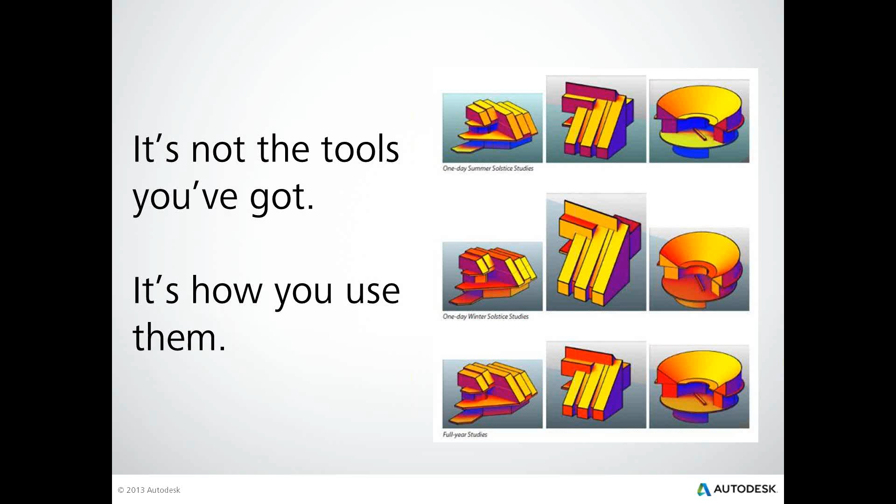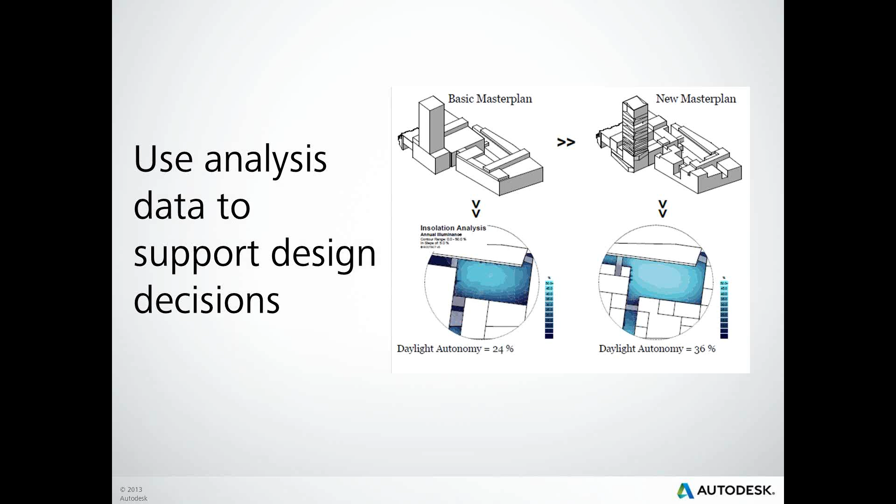Autodesk has worked really hard to try to make building performance analysis easier. And there's a danger in that when it becomes so easy that you can just press buttons and start to see results, it's easy to start getting results without knowing either what the inputs are that led to that result or understanding what to do with the output of that result to make a better design decision. So we see a lot of people sort of just pressing buttons and looking at colors without really knowing what to do. For example, with a false color overlay like what you just saw. And what we're looking for is equipping people to be able to use analysis data to support design decisions in a more rigorous way.

And what we find is that architecture students often don't learn enough building science and analysis in their programs. Many engineering students don't learn about buildings at all. That was the case with me in my mechanical engineering course. And professionals are being asked to use new tools and processes. And we're hearing from both educators as well as people in industry that it's a core competency to be able to predict and assess building performance, that there's a shortage of people that actually know how to do this work in a real way. People are having difficulty finding employees with adequate green skills. This is as phrased with a fall 2012 survey from the AIA.

And part of the opportunity here is that students actually want to learn this stuff, and sometimes they don't have classes in it. So we've built this program to allow anybody that wants to learn building performance analysis to be able to study this stuff on their own and learn it in their own time.

And I think here it's worth mentioning that some of you may be on this call because your instructor suggested that you join, and this is going to be a required part of your course or an extra credit part of a course. Or some of you may just want to learn this stuff on your own. And this course is built for both scenarios.

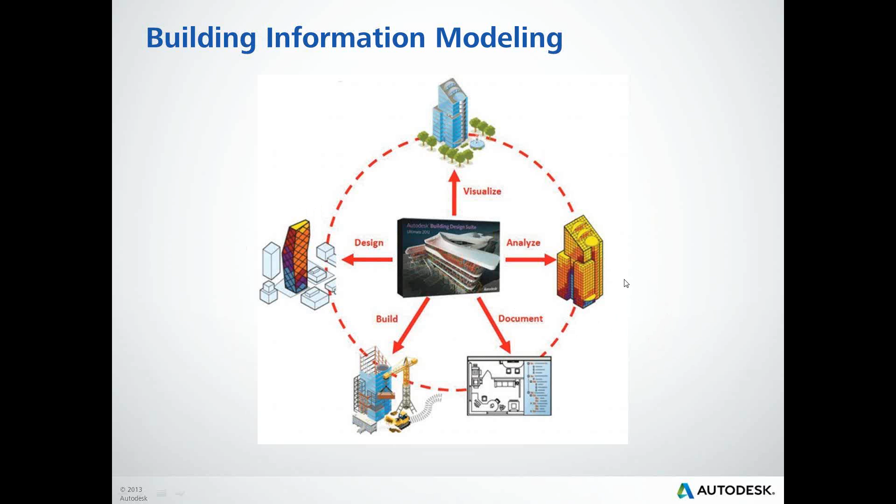This course focuses on analysis and design and how those things can be used together, how analysis can inform design. Revit and Vasari are the main tools that are covered in the course. Vasari essentially is a simplified version of Revit. It only includes conceptual masses, so that's what you see here. Big blocky buildings. You're not seeing exact windows and exact doors, it's more for form and orientation and things like that. But you can do a lot of interesting analysis on top of these forms, and making performance-related design decisions early in the process is often really valuable.

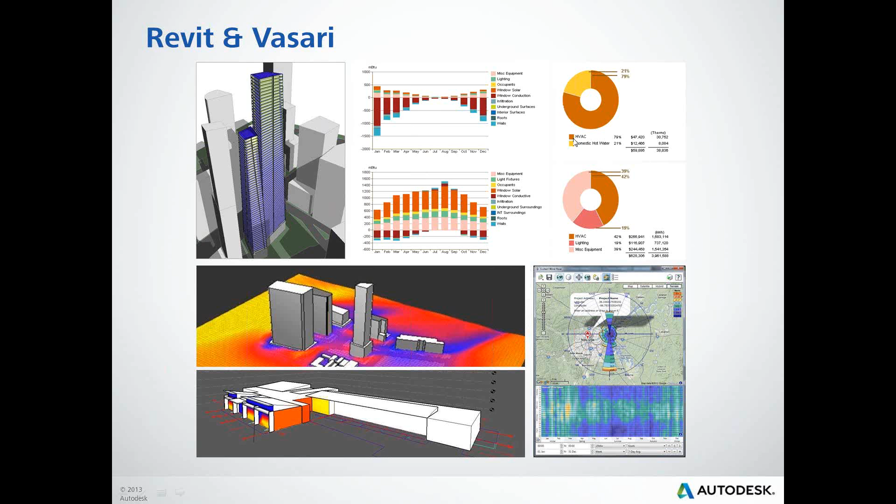So that's why basically Vasari has been hived off from Revit, and it's got the conceptual massing plus some additional analysis capabilities that we'll talk a little bit more about later. But you see some examples of it here with wind and airflow analysis around a building and solar radiation analysis on the faces of a building. And both Revit and Vasari have whole building energy analysis capabilities within them. So that's some of the charts you see here. And we'll talk a little bit more about that right now.

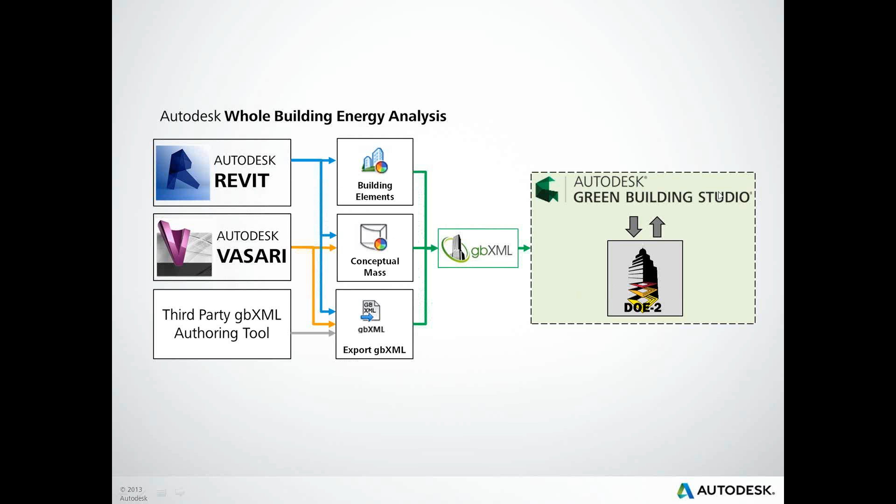And all of this, like Green Building, gbXML is a file format that passes it to Green Building Studio, and it uses DOE-2 as a simulation engine. So often people are really confused with how our tools relate to each other. This is sort of how they relate to each other. Revit and Vasari are alternate ways of getting a three-dimensional model into Green Building Studio where you can do a whole building energy analysis.

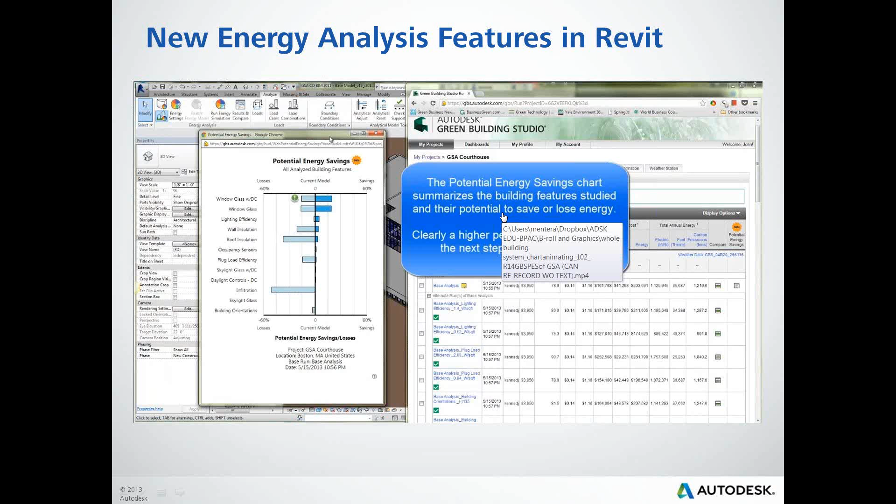There's some new energy analysis features in Revit that we're really excited about. I'm going to give you guys a quick demo of that right now. I'll talk over this video a little bit. So in the past, it was always harder to do energy analysis on really detailed models. So this is an example of a detailed Revit model that's got curtain walls and windows and shading devices, and maybe very detailed. And that would have been a model that an architect would have made, not thinking

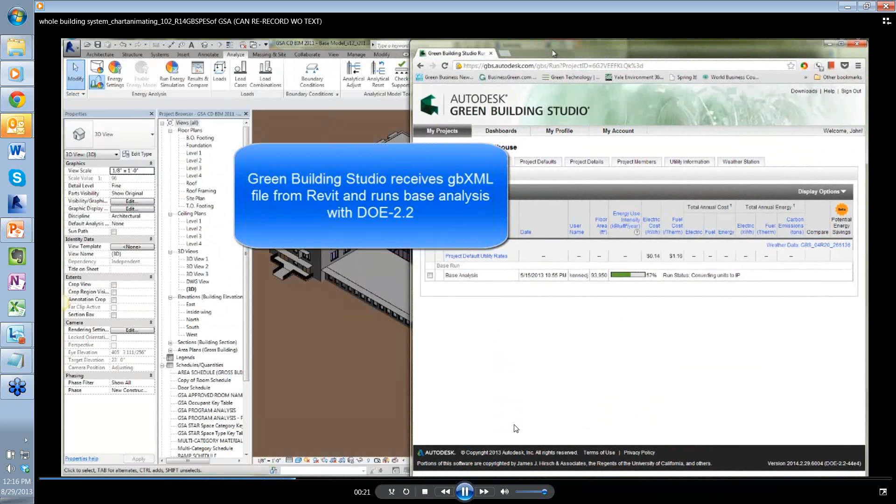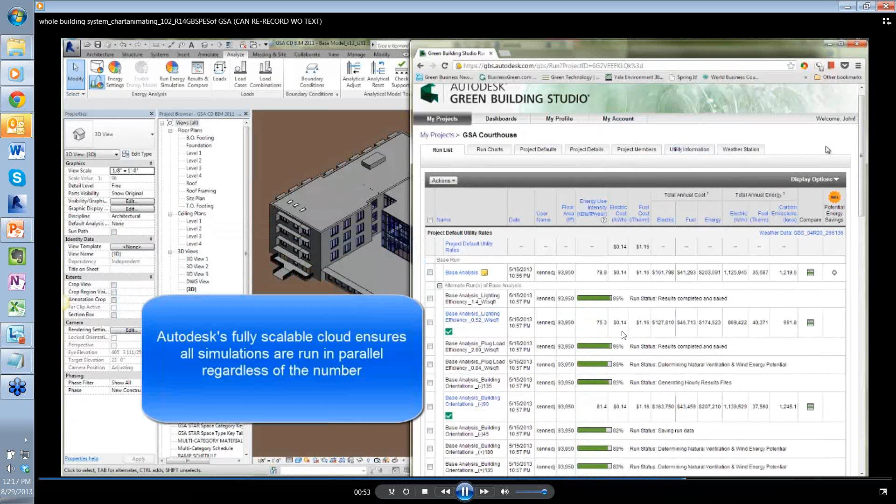about energy analysis. Now you can basically click a button, and it already happened in the video. This button here, building element model within Revit, and it generates the energy model in a much better way than it ever has in the past. So you can trust the geometry that's coming out and creating what we call an energy analytical model. And you can see here that there's actually a bunch of different runs: you press simulate once, and all of a sudden there's 40 runs that are going.

And what's happening is it's varying design parameters, like how high performance are the windows, what's the insulation like, how much infiltration is happening, what's the building orientation, and then it's putting all of that on one chart for you, so you know what the most important parameters are to optimize, and how sensitive your building is to these different parameters. In the past, getting this kind of insight would have required a lot of trial and error, and now it's much easier. So that's an example of one of the things that's covered in this course.

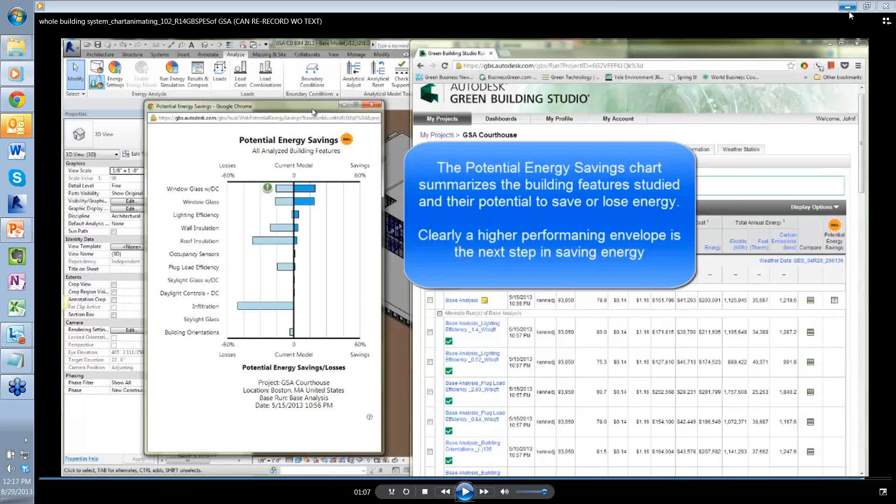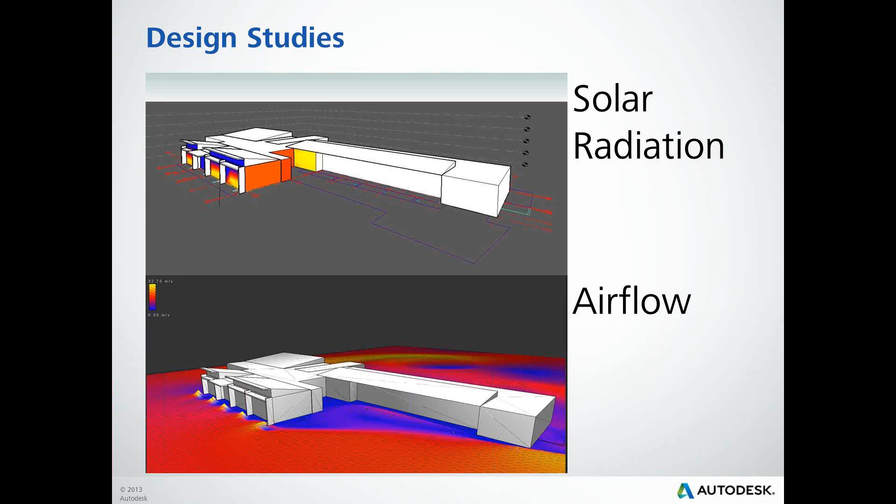So whole building energy analysis is a great way of keeping score of how well your design is doing from an energy perspective. There's also a lot of other capabilities in the software, which we call sustainable design studies, which are taking a particular aspect that might influence building performance, like solar radiation on a building or airflow, and then studying that in more detail. And when you do that in combination with whole building energy analysis, it's much more powerful. So we cover how these things relate to each other and how one type of analysis can inform the other kind. So we're basically looking to help you understand a fuller workflow of how building performance analysis can be integrated with BIM into your design process.

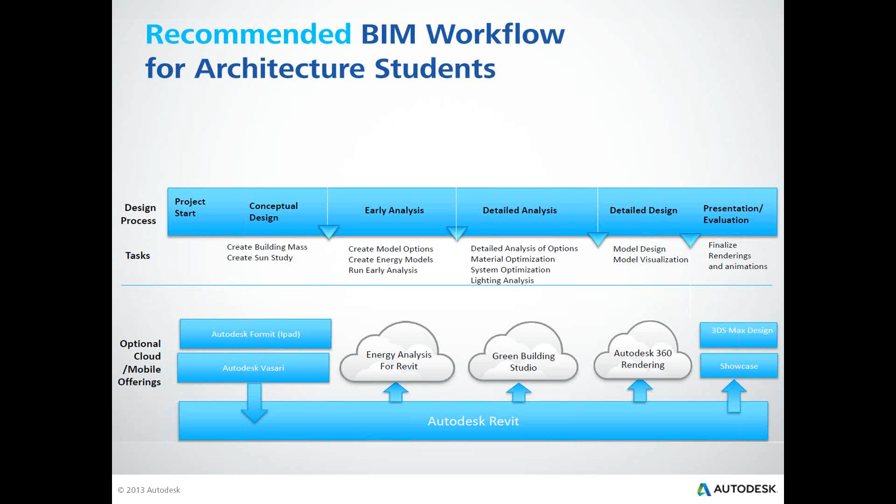All right, so we're going to talk a little bit more now about how this course works. As I mentioned before, it's a self-paced, free online course. You're able to track your progress on quizzes and your progress through the content on one platform. We've piloted this course with 700 students so far over the past year and 20 educators. And with this release of it, we're making a lot of improvements that we think are going to really improve your experience. So let me tell you a little bit more about what some of those are.

One is we've structured the course with a clearer outline, and we've broken the course up into smaller chunks. So if you have 15 minutes here, 15 minutes there, you can make steady progress on the course without having to do large time-consuming quizzes. As part of that, we've created a separate little introduction to the software part of those outlines. So as you can see here, basically the way it works is you get an introduction to a topic, you learn some of the fundamentals, then you learn the software. Having understood some of these fundamentals, you then understand why the software is doing some of what it's doing. And then the next parts of the quiz have software exercises, and you start to apply what you've learned.

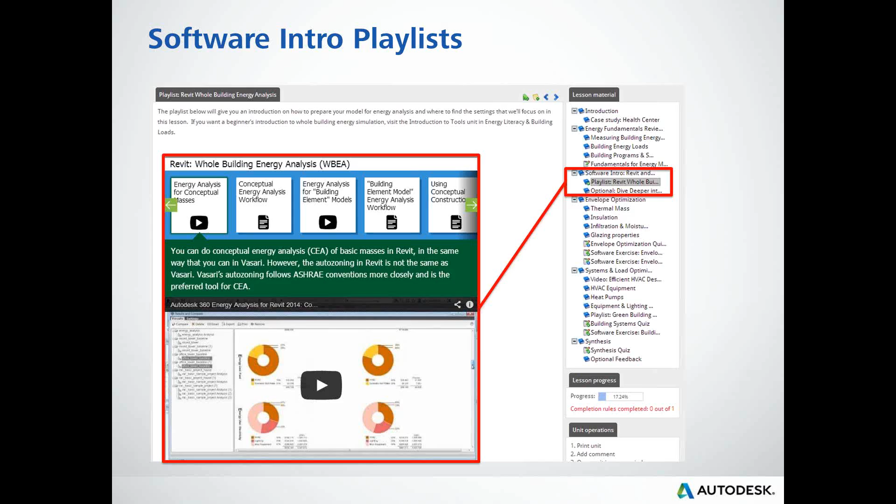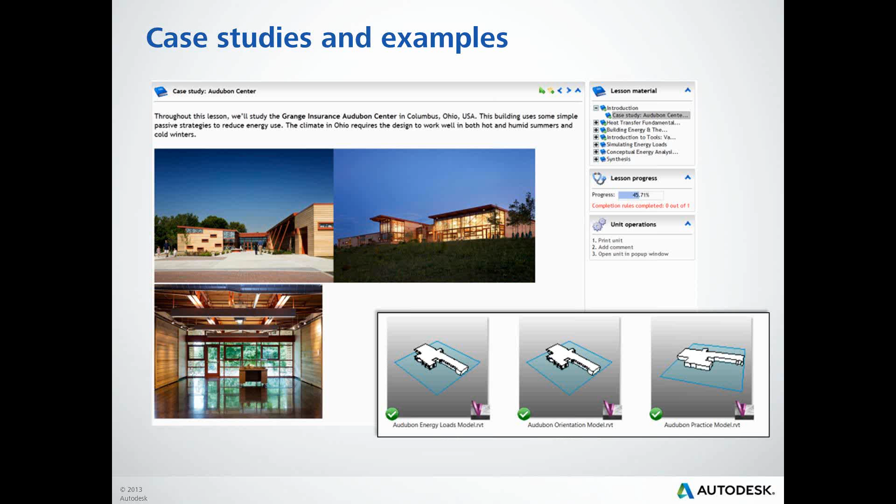We do this, and Stephanie's going to show this to you in the tour here in a second, through these playlists where we're basically curating the best content that Autodesk has on how to use the tools and presenting it to you in an ordered manner so you can get started quickly with the tools as part of the module. We've also tried to integrate case studies and examples more than we have in the pilot rounds of this program. So it's always great to see these principles in action and see example buildings. So we've tried to do that, and we've tried to also base software exercises on those examples. So now I'm going to turn it over to Stephanie, and she is going to give you a tour of the learning management system.

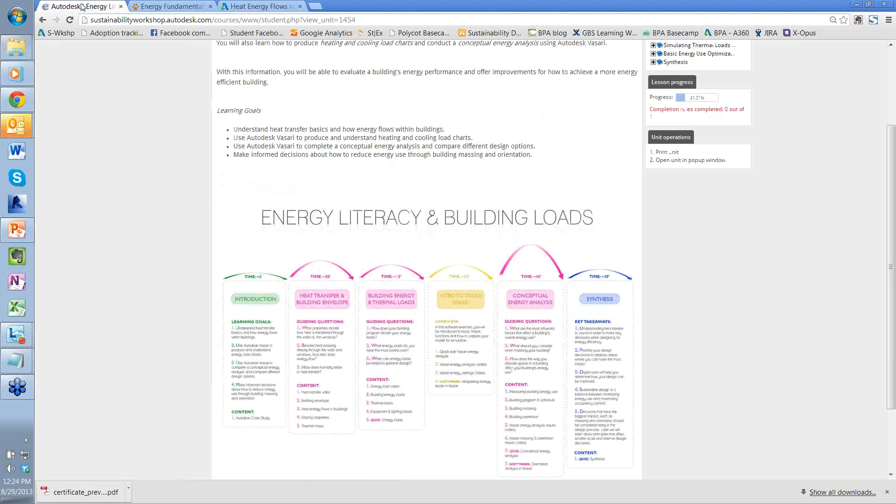So this is the first page. Here's the syllabus that Adam showed you earlier. You can click on it to enlarge it, and you'll get to see specifically what you're working on in this lesson. So we can go back and click down to the next one. Again, your navigation's over here, so feel free to drop down. You can do the lessons in whichever order you want, and you can also skip around in here.

So maybe I'm ready to go to the thermal mass page. This page is directly from the Sustainability Workshop. One of the things we've built into the course is all the resource material you're seeing here is available on Sustainability Workshop, or through our product help documentation. So even after you've completed the course, you still have access to all these great resources.

So now let's look at what a quiz looks like. Let's look at the building loads quiz. You'll see this one has 10 questions. Most of the quizzes have 5 questions, and these are just little lightning quizzes to make sure that you're understanding all the concepts we previously talked about in this section. You're going to need a 70% to pass all the quizzes and be able to move on and earn the certificate. You have an unlimited amount of tries for the quiz, and the system will save your best score. So if you pass it with an 80%, you can retake it, and if you earn 90%, then the 90% will be saved.

As you can see, the questions are a mix. Some are based on images, which, again, when you see this finger, you can click to enlarge. Some of them are select multiple.

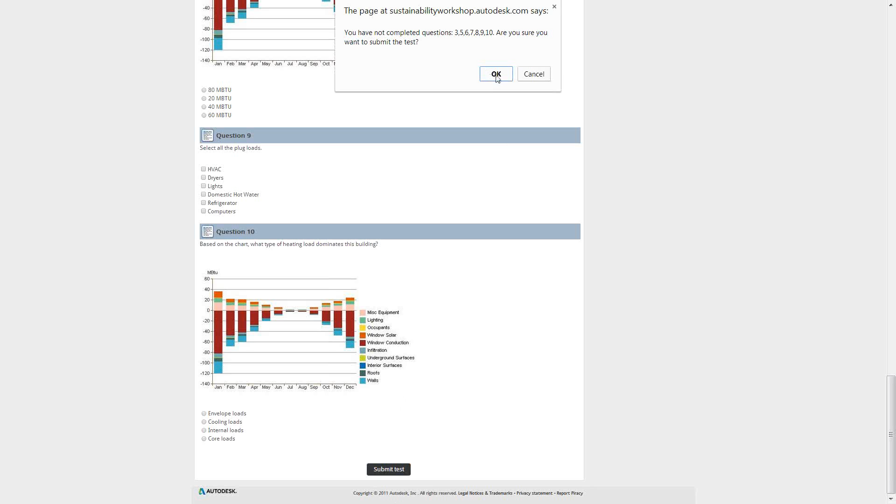It's warning me that I didn't answer a lot of the questions in this quiz, but for this purpose we'll just say OK. Not surprisingly, I didn't pass this quiz because I just kind of clicked around. But the feedback we're getting tells us what's correct.

And if we're incorrect, let's scroll down to one that we got wrong. It's incorrect here, but we know there's a link right here that will lead us to where we can find the right answer. So this link here will just direct us back to one of these pages that will help guide you to find the right answer.

So again, if I'm unhappy with this test, and obviously I failed, so I can't earn my certificate, you can just simply press Redo Test up here, and you can start fresh and take the quiz again. So that's pretty much working with the quizzes and the content.

One more thing I want to show you guys is kind of how we're integrating software into this. So all this stuff has been fundamentals. Now we're going to look at how we're integrating the Autodesk software into this.

So in each lesson, we have a software intro, and we're specifying which software we're using in this lesson, why we're using it, and what we're going to get out of it. We're also including practice download data sets. This is a data set you can download and practice with, play around, try some different analysis things that we're going to guide you through in the next few pages.

This playlist is the next part, and this is really the bulk of the content. A lot of it is pulled from our Wiki help documentation, and a lot of it's also videos that have been created. So you can see here in this playlist icon, the text, here's some text, here's step-by-step instructions on how to do something. Here's a video with instructions on how to do some energy analysis.

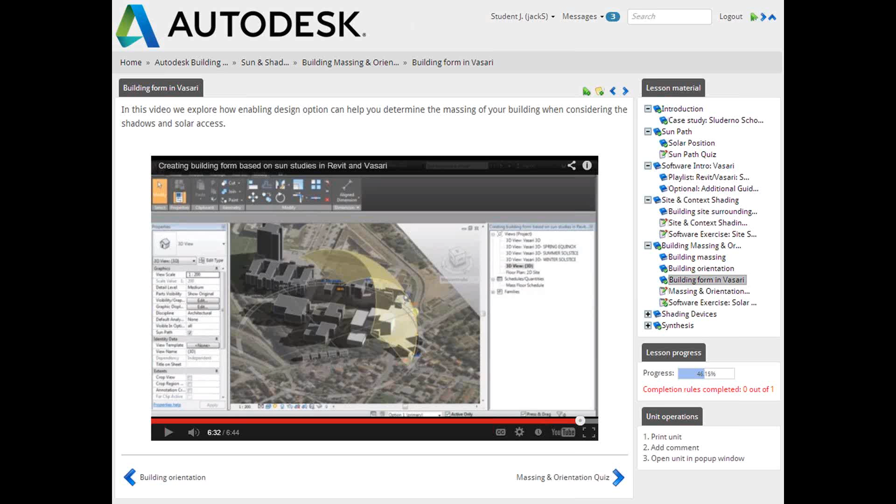I also saw a few questions about how this relates to LEED. Some of you may have LEED GA or even LEED AP. This course is not specific to LEED, but it's designed to be synergistic with it, in the sense that it covers the building design strategies and fundamentals that are important to sustainable design no matter what. A physics-based understanding of how heat flows is going to help you design a more energy efficient building, which is going to give you LEED points. Right now, we don't have a predefined number of LEED continuing education units that you get as part of this course, but in the past students have had really good luck submitting. If that's important to you, you can submit those hours through the GBCI and get LEED credit for it, but it's not LEED specific credit.

I also saw some questions about time investment. It takes about 25 hours to do everything, based on student feedback we've gotten in the past. Again, that depends on experience. If you have a lot of experience with either these topics around building science or with using the tools, you can do it faster. If you're new to it, it's probably going to take you longer.

The good news is that support is available. We have a helpline manned by Stephanie and I, and we'll make sure to get your questions answered.

There's also some complementary programs that go along with the BPA certificate program. We have academic research relationships that we're setting up with different institutions. These middle two bullets are, I think, some of the more important ones for you as students. We have an analysis awards program where any project you do, where you use building performance analysis with Autodesk tools as part of the workflow, you can submit to us. We take a look, and we have different rounds of judging. About 3 or 4 times a year we give excellence in analysis awards, and the winners are featured on the sustainability workshop and become part of that database of examples, which is really important if you're looking to do something new or see examples of people doing this work well.

Let's talk about next steps. If you're interested in doing this, what happens? If you're on this call, we'll send you an email tomorrow with the exact instructions and links, and you'll be the first people who can sign up for the actual course. The reason it hasn't been possible to sign up and get into that system Stephanie showed you earlier is that it wasn't ready. It will be ready tomorrow. From that point on, you can sign up whenever you want, and it will be rolling admissions.

There's no expiration date for the course, but your account will be terminated if you're inactive for 3 months. And as I mentioned before, 3 of the modules will be released after the launch.

So the basic process for registering and starting the course is: first, you need an access key. That's either going to come from your professor or from the Sustainability Workshop website. If you're an independent student doing this on your own, there'll be a key posted to the Sustainability Workshop website that you use. Right now there's a limit of 500 independent students just for this first week, so the system doesn't crash, but we'll be expanding based on demand. So there should be no significant delays in getting into the course.

Once you have your access key, you can create an account and enter your key. Instructions for all of that are here on the Sustainability Workshop website. If you go to the Engage tab and under Building BPA Certificate, this is where the key will be, and the link to access the course will be right here. There are more instructions for how to get started using the learning management system in the student's guide.

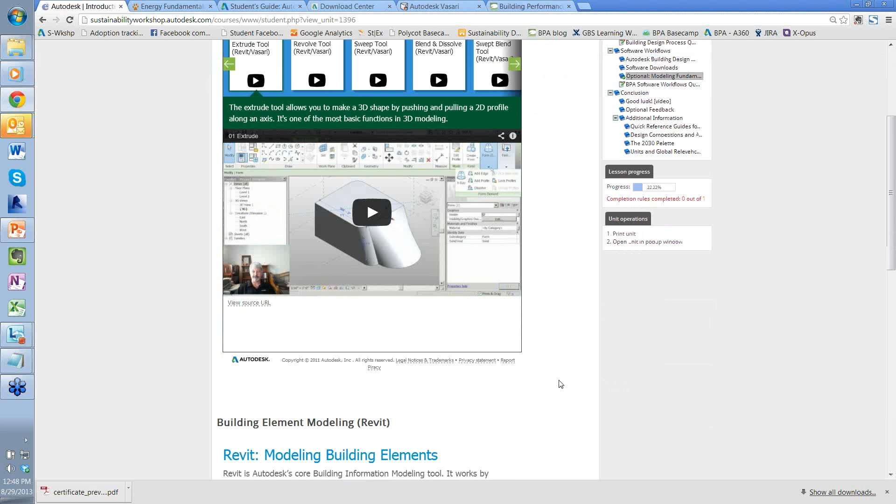So I'm in the course here, and say I've never used Revit before. When I'm in the introduction course, there's a modeling fundamentals page. So here, if you've never done conceptual modeling, this playlist will teach you the basics. So how do you do extrude, revolve, sweep, etc. That'll get you up to speed with how to use Vasari. If you've never used Revit before, there's this playlist that will help you learn the modeling fundamentals. So if you never used these tools before, it's worthwhile to pause at this particular place and get comfortable with how they work.

So another good question is, we mentioned that there was a 500 limit on the independent sign-up. What happens if someone goes and there's no more registration keys left? Basically, check back in a week and it will be open again. The way that platform works that we showed you is that we have a certain number of users that we're allowed to use. We plan to extend that right along with demand. But because it's a brand new system for us, we need to be careful about slamming the system too early with so many users. So that's why we've put the 500 cap on it, but it will be, as I said, a matter of a week or so at the latest that it would be extended.

So if you're on this call, you don't have to worry about that because we're going to send you an email tomorrow and you'll be among the first people that will have the information required to register. Okay, so will the certificate expire and what's the process? Will it expire or will it last forever? How does that kind of work? Will they need to renew a certificate?